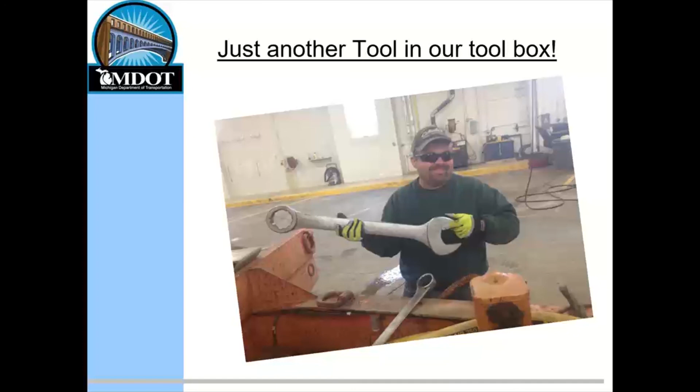Our thin epoxy overlays have become just another tool in our toolbox in Michigan. We've been applying them since the mid-1990s and have had great success with them. Since 2006, our state forces have applied roughly 2 million square feet of thin epoxy overlay, and our Michigan bridge contractors have placed roughly 9 million square feet on our bridge decks.

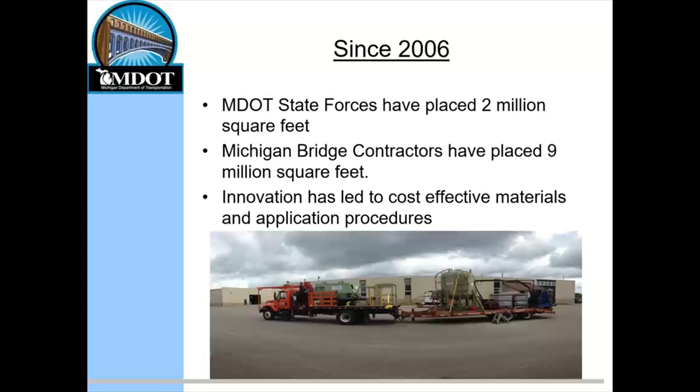We've had several innovations over the years, and we've got a really good tight spec scoping process that we use. For scoping thin epoxy overlays in Michigan, we pretty much look at any bridge deck that's 1 year or older. We like to see our new bridge decks go through at least one season, one cycle of weather, to see how they're holding up before we cover up the surface.

For our older decks, we look at any deck with a deck bottom rating of fair or better. If your deck bottom is already bad, why bother? We also look at a deck surface condition that doesn't have more deck patching necessary than would require a rigid overlay. And also, some of our older decks, the tining is worn off or never had tining to begin with.

We're just looking for a general increase in our skid number. Typical skid number on a tined Michigan bridge deck is only 40. Typical skid number on a Michigan bridge deck with our thin overlay system is 65. We don't use calcined bauxite on all of our thin polymer overlays, so this is just with our standard aggregate.

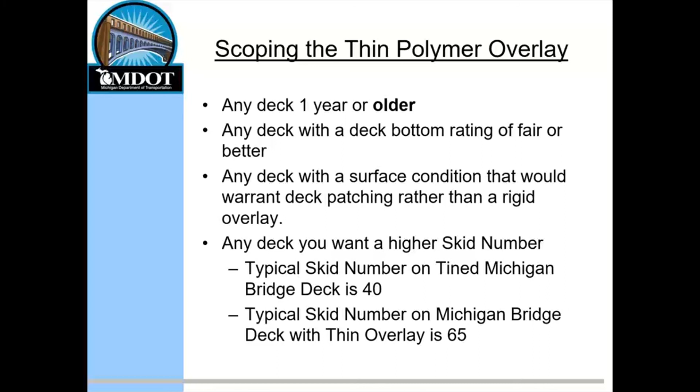The life expectancy of thin epoxy overlays with proper surface preparation—because surface preparation is everything—thin epoxy overlay treatments will last 15 to 20 years in Michigan. Some of our older ones may have some cracks, which you can repair by chasing them with a healer sealer epoxy. You can also repair delaminations. At the end of life, we're having a lot of success, with the snowplows having removed enough of them, milling off the old thin epoxy overlay and replacing another one.

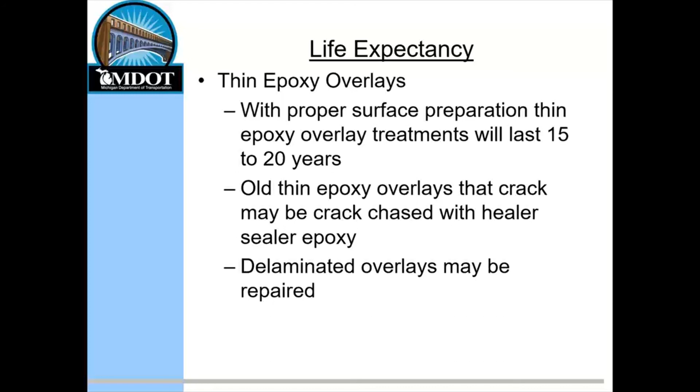We really like our specification in Michigan. It pretty much guarantees that we're going to get 15 to 20 years life. The first thing, not listed here, is that we require a 5-year warranty from our contractors on our thin epoxy overlays. That really incentivizes the contractors to do it right and not cut any corners.

In our experience, if corners are cut, the thin epoxy overlay will fail within the first 2 to 3 years. So that 5-year warranty, if it makes it 5 years without any problem, we know it was put on correctly, and we're pretty much guaranteed that it's going to last 20 years.

Our specification follows closely the ACI 503.3 specification for producing skid-resistant surfaces on concrete. The next couple of slides will show you how we've tweaked that specification a little bit to fit Michigan's needs and guarantee the 20-year life.

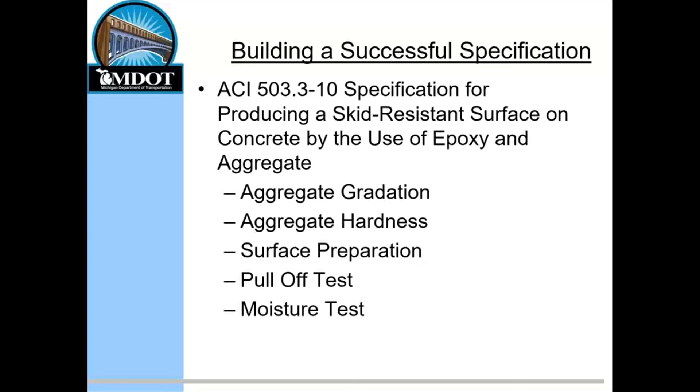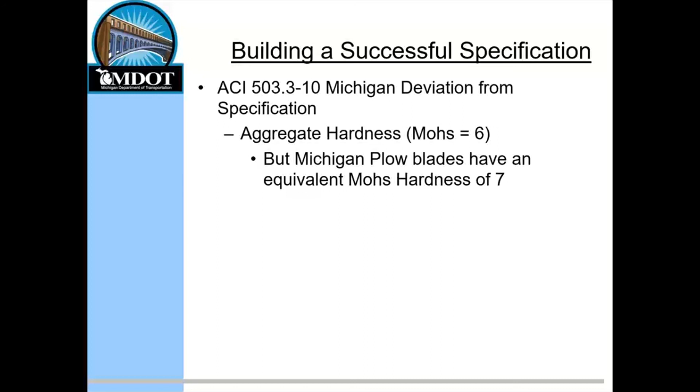Our first deviation: most specifications call for a Mohs hardness of the aggregate of 6. Our Michigan plow blades have an equivalent Mohs hardness of 7. We call for a 7 minimum Mohs hardness on our aggregate in our specification to slow down the polishing of our aggregates.

Another deviation—the ACI spec only indicates that the surface to receive epoxies is to be free of loose and unsound materials and contamination that will affect the cure or adhesion. We kind of look towards ICRI, which states a CSP of 5 or greater for thin overlays.

So in Michigan's experience, to get the 20 years and guarantee adhesion, our spec calls for a CSP of 7 or greater. That's really to help out our inspectors. If the contractor is only shooting for a CSP of 5, there could be areas less than a 5. But if they're shooting for a CSP of 7, you're almost guaranteed to not have any areas on the deck less than that CSP of 5.

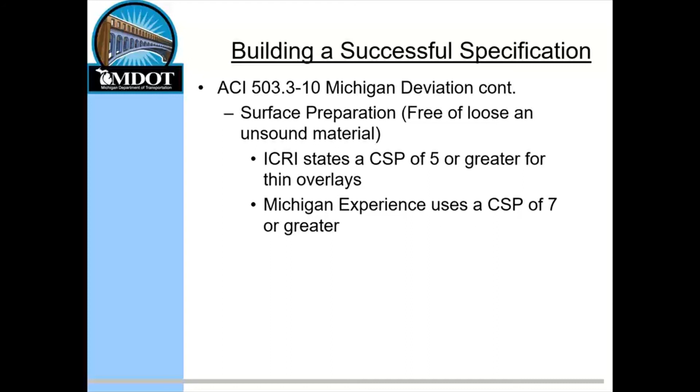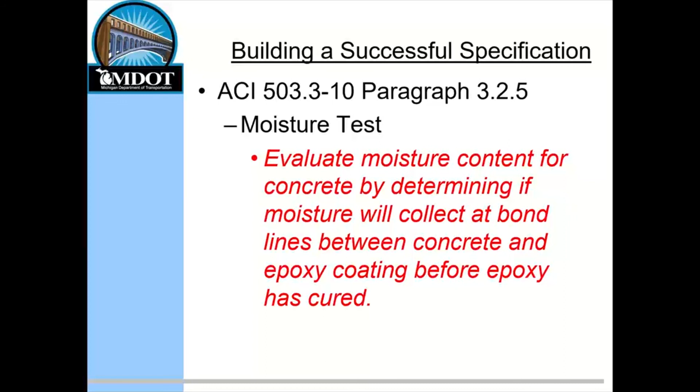Some people try to use a moisture meter to make it an exact science. In Michigan, we just don't use that and we don't allow it. We go with the ASTM D4263 moisture test, which requires a 18-inch by 18-inch polyethylene sheet taped to the deck.

And we evaluate for the condensation. Our test time and our specification is based on the selected product that the contractor is using and the manufacturer's expected cure time given atmospheric conditions at the time of installation. So it can vary.

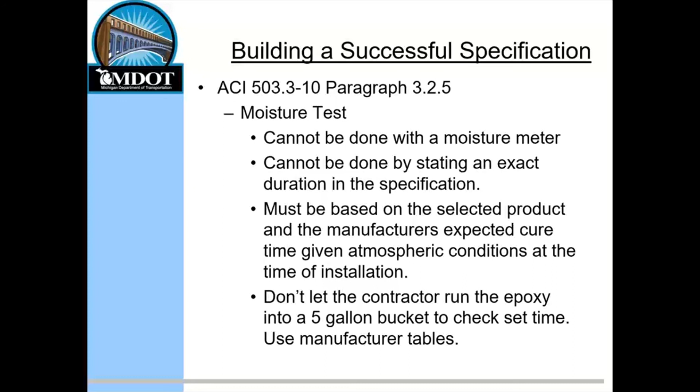But it is what we expect to get that expected cure time. Another thing is to make sure that the contractor doesn't just dump a bunch of epoxy into a 5-gallon bucket and see how long it takes to set. Epoxy is a very exothermic reaction, so that set time won't match the set time that is going to be on your deck. The contractors have to follow the manufacturer's guidelines for set time and temperature.

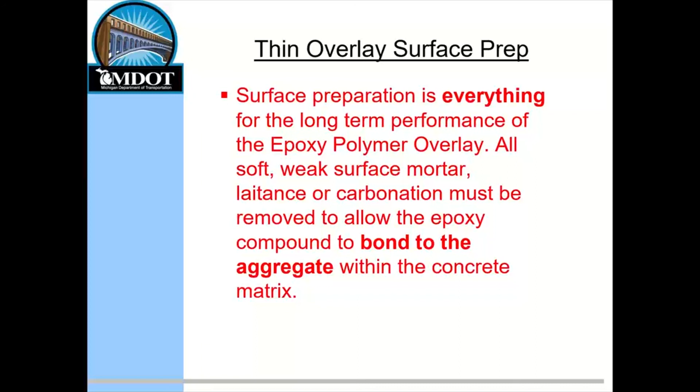Thin overlay surface prep. Surface preparation is everything for the long-term performance of an epoxy overlay. All soft, weak surface mortar, laitance, and carbonation must be removed to allow the epoxy to bond to the aggregate within the concrete matrix. We pulled this out of a couple of sources, and you'll notice that it doesn't say allow the epoxy compound to bond to the cement paste or anything else. It says bond to the aggregate within the concrete matrix.

And it's for that reason that in Michigan, we require our deck tining to be removed. All of our deck tining is installed wet, and it is our belief that the wet installation of the tining will push the aggregate down. So if you're not removing your tining and you're installing your tining wet when you're pouring your deck, then you're not getting as much aggregate exposed and you're not getting as much aggregate to adhere to.

Like Greg said, paint striping is a bond breaker. Paint striping has to be removed. And if any unsound areas are discovered, you have to delay the application. Most manufacturers will not recommend their product be placed over concrete less than 28 days old. And lastly, once the surface is prepared and ready for the overlay, vehicles are no longer allowed on the prepared surface, except for the one vehicle that is distributing the epoxy and the aggregate.

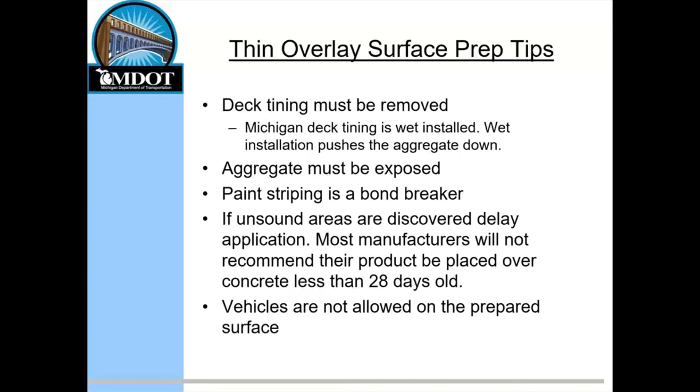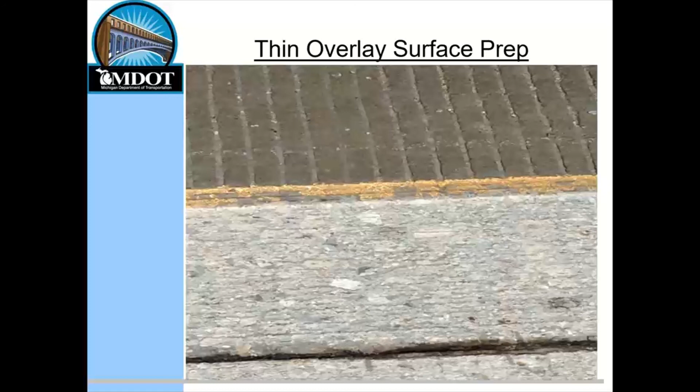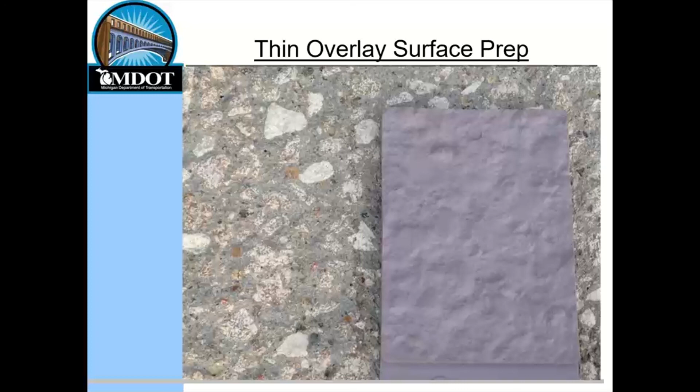Here's where we kind of transition the presentation. Michigan has been applying these thin overlays since the mid-1990s. And like I said, most manufacturers will not recommend their product be placed over concrete less than 28 days old. That ends up being somewhat of a problem in construction. We're always getting the question, well, can we install it earlier? So the rest of my presentation will focus on how Michigan has investigated ways to shorten this time.

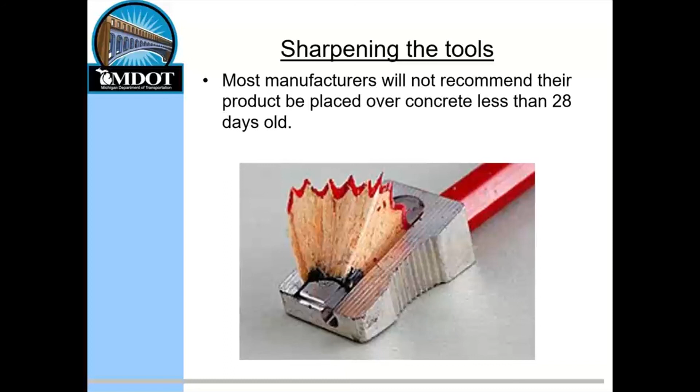One of the easiest ways to sharpen your tools is to attend these AASHTO TSP2 Bridge Preservation Partnership meetings. It's where I got access to vendors for innovative materials, and that's where I started testing non-cementitious patching materials. This led to MDOT developing the special provision for rapid setting polymer patching concrete material. It's for use on jobs with small amounts of deck patching that are going to receive a thin epoxy overlay. And I say small amounts of deck patching because they are quite expensive.

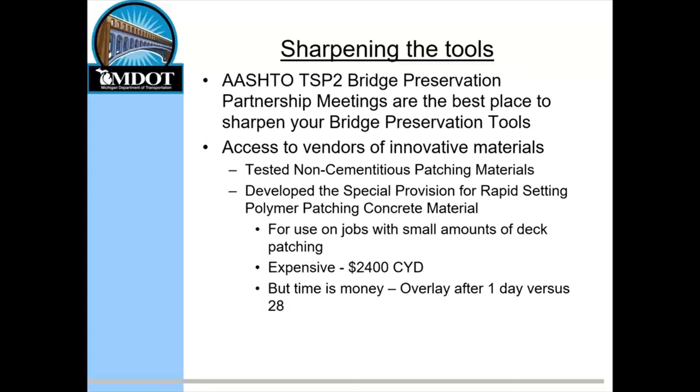They run about $2,400 a cubic yard just for the material alone. But as you know, time is money. And these small deck patches using the non-cementitious patching materials can be overlaid after 1 day versus 28.

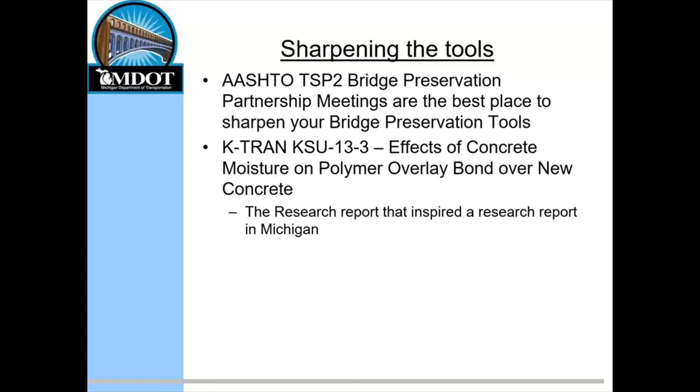Also, at an AASHTO TSP2 Bridge Preservation Partnership meeting, I learned about the research project, KTRAN KSU-13-3, the effects of concrete moisture on polymer overlay bond over new concrete. And that inspired a research submittal that I put in to research Michigan bridge concrete and the epoxy materials that we use, to see if we could come up with a similar result with our mix designs to reduce the age of the concrete at the time of application.

So in this presentation, I'm going to transition here into presenting the results of the research project. It's in a state of almost being complete, they're in the final draft of the report, and this is detailing MDOT's research into reducing the concrete age.

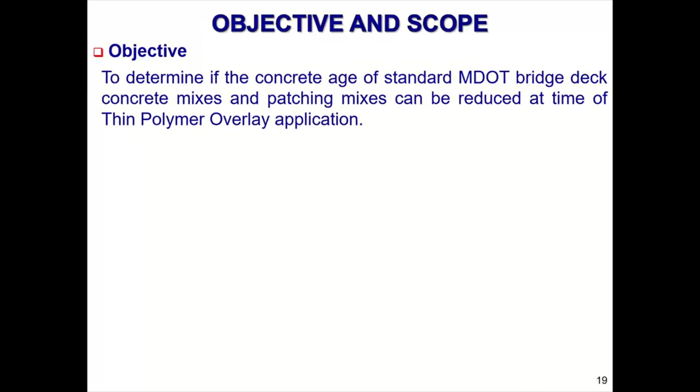But before I begin, I want to note that some of the presentation does have specific product names used, and we don't want to say that this is an endorsement of any of those products. We just chose 2 epoxies that we commonly see in Michigan being used by our contractors and our maintenance crews. This is to determine the concrete age of standard MDOT bridge deck concrete mixes and patching mixes can be reduced at time of thin polymer overlay application.

In order to measure this, Western Michigan University looked at several different variables. They looked at T1.

T1 is the maximum wet curing duration for the concrete to either T1A reach the flexural and compressive strength requirement in our mix design, T1B develop a discontinuous pore structure within the concrete, or T1C develop total permeable voids to ensure concrete durability from air entrainment.

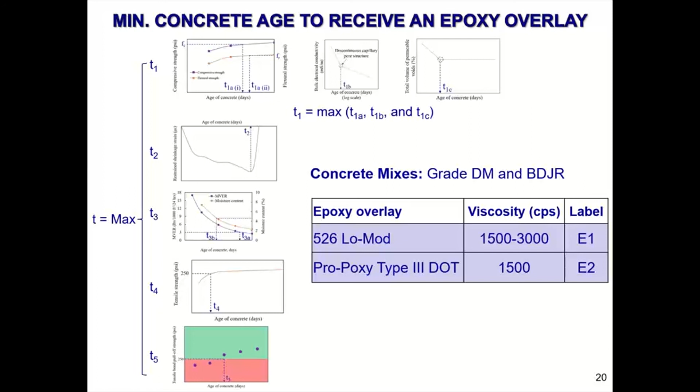They looked at time to cracking, T2. They looked at time to reach an industry standard for moisture vapor emission rate, T3. They looked at T4, the time for concrete to reach 250 psi tensile strength, required to pass the overlay pull-off strength test. And lastly T5, the time to reach 250 psi bond strength between the epoxy overlay and the concrete.

We also looked at 2 MDOT bridge deck mixes: grade DM and grade BDJR. The grade DM substitutes some of the type 1 cement with ground granulated blast furnace slag. So we have 2 different mixes.

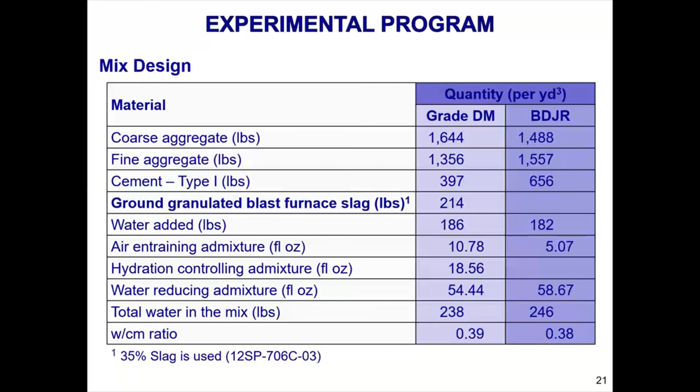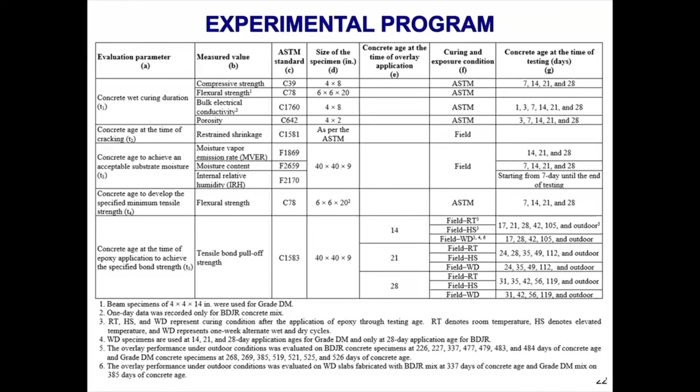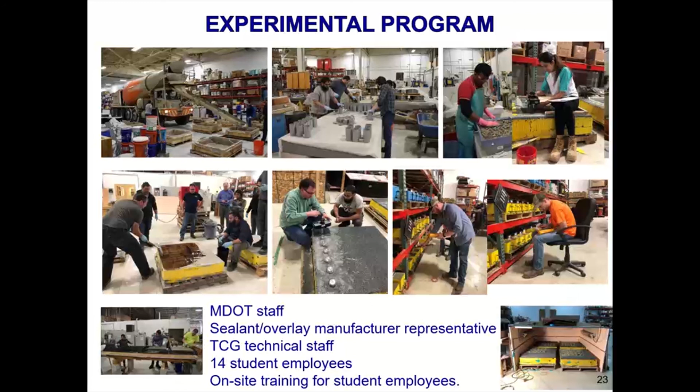Here's some pictures of the process at the Turney Group where all of the concrete slabs were made. It was a collaborative effort - we had several people from MDOT, TSP2 industry partners, as well as Western Michigan University and Turney Group staff.

So they're starting to get into the results after they poured the concrete. They first looked at wet curing duration for our grade DM concrete - you'd want to make sure this would be the minimum at which we could apply an overlay. To meet the strength requirement was 7 days. To meet the discontinuous capillary pore structure took 9 days of wet curing, and to meet the porosity requirement took 10 days of wet curing.

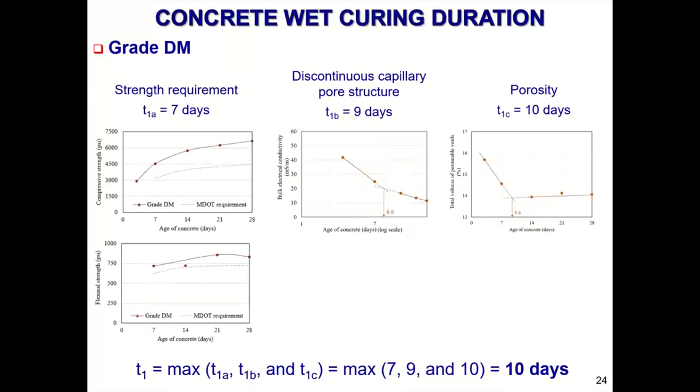As a side note, this ended up pointing out to MDOT that we do not wet cure our grade DM concrete long enough to get the durability that we want. Right now, we only have a 7-day wet cure for our grade DM concrete. So that was just an added bonus of this research project.

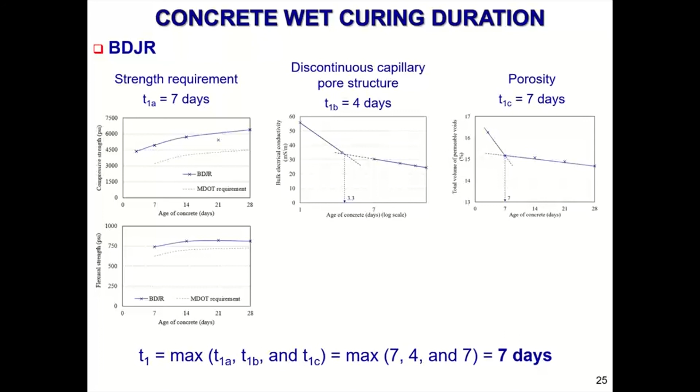For the grade BDJR, you can see that for all 3 of those variables, the maximum amount of time was 7 days. We also looked at concrete at the time of cracking.

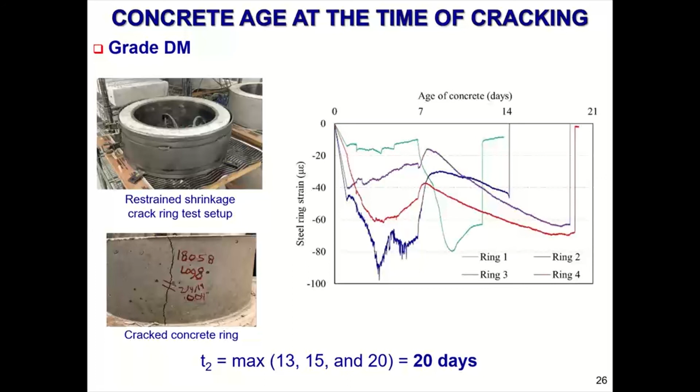Grade DM cracked at 20 days, so we wanted to make sure the concrete had cracked before we placed the thin epoxy overlay. For our grade BDJR, it cracked at 18 days.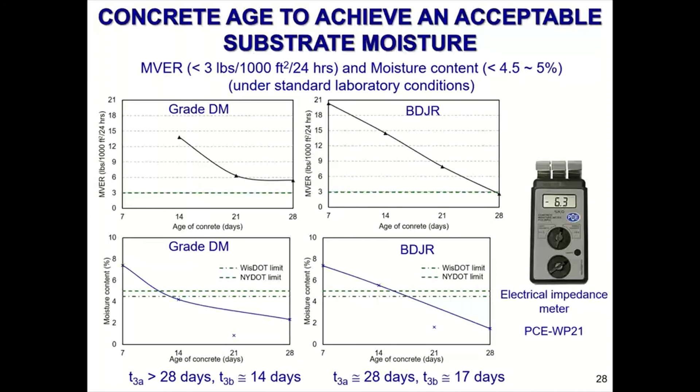You can see that our grade DM concrete never actually hits the moisture vapor emission rate industry standard. But to get underneath the moisture content percent that a few other DOTs use, our grade DM concrete hit that in 14 days, and our grade BDJR concrete hit that in 17 days.

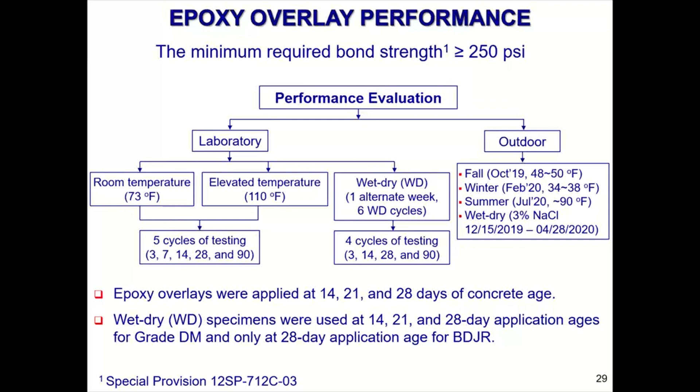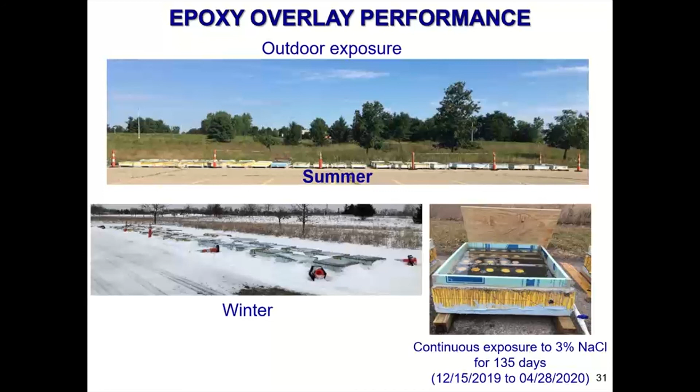Another thing we did was, once they were done in the lab, we said, why don't you take them outside and ship them over from the Turney group to Western Michigan University's engineering building parking lot, and let them sit there and percolate for a couple of winters in Michigan weather.

Let me give a little detail on the different failure modes you can have in a tensile pull-off strength test for thin epoxy overlays. Type A is what you're looking for - the epoxy does not fail, the bond does not fail, instead it fails the concrete. Type B failure is a bond failure between the concrete and the overlay interface. A type C failure is a failure in the overlay itself - you have 2 layers of thin epoxy overlay and you don't want a failure there. Type D is a bond failure between your testing machine and the epoxy.

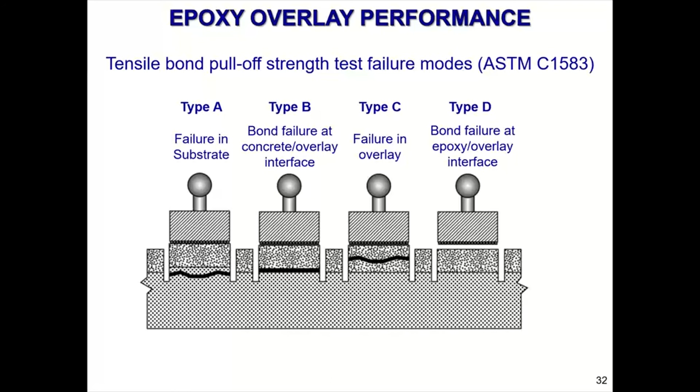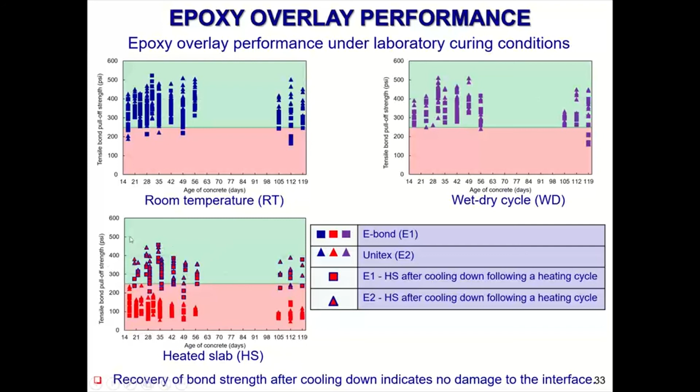In the upper right, you can see that nearly all of the slabs came back greater than 250 PSI in the pull-off test after wet-dry cycles of a salt solution. But in the bottom left, a lot of the slabs tested at 110 degrees Fahrenheit failed. They all failed while heated at 110, but once they retested them after cooling back down to room temperature, they all passed again.

Epoxy overlay performance: this is some of the results we had from the parking lot compared to the lab tests. They performed outdoor testing in October 2019, when the ambient temperature was 48 to 50 degrees and the slabs were all greater than 200 days old. They also tested in February 2020 at about 34 degrees, and all slabs, regardless of concrete age when the overlay was applied, passed the pull-off test. However, all the pull-off tests in July 2020, when the outside temperature was 90, failed—those were less than 250 PSI.

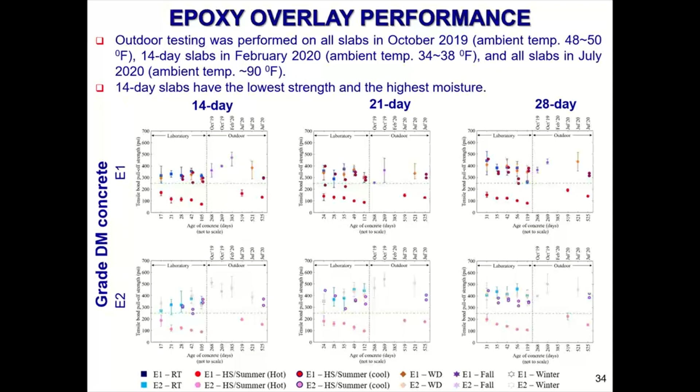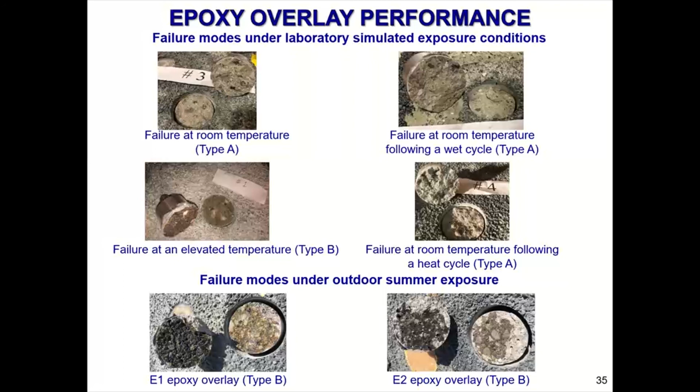Outside, the ones tested in the summer were kind of a mix. There wasn't necessarily a clear pattern—primarily failure at the interface, but also a little bit of failure in the concrete as well.

So, epoxy overlay performance based on these results: MDOT. Basically, several manufacturers limit their substrate temperatures to 90 or 100 degrees at time of installation of thin epoxy overlay. This indicates that we need to update our specification to put an upper bound on the temperature at time of installation, because right now it only has a lower bound.

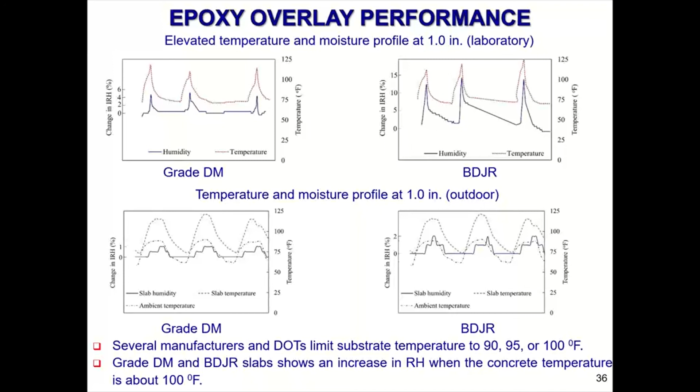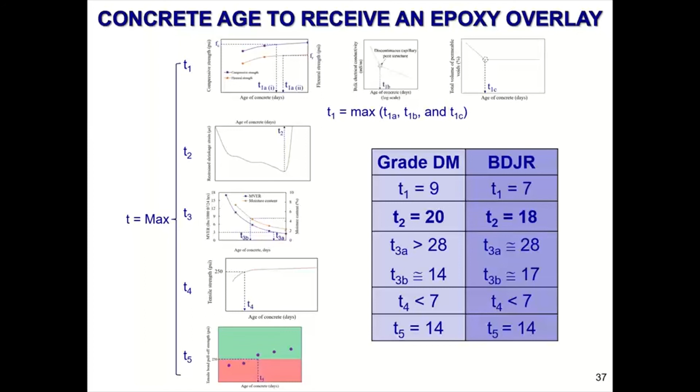This is the results of all the tests. You can see that for grade DM, you shouldn't put the thin polymer overlay on concrete less than 20 days old. For BDJR, you should not put it on concrete less than 18 days old. So the recommendations from the research project to MDOT: epoxy overlays can be applied on bridge decks when grade DM concrete is 20 days old, BDJR 18 days. They're indicating that grade DM gives us better results overall and over time.

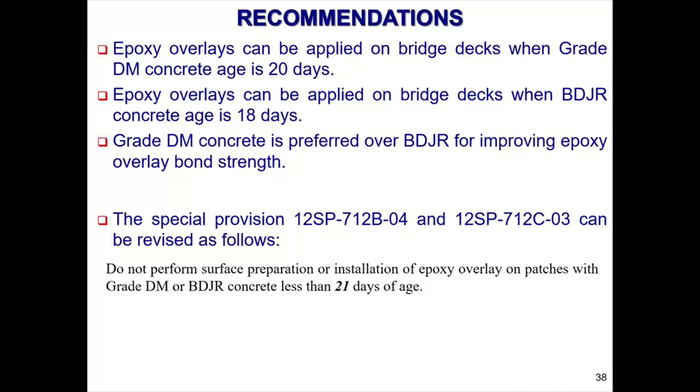So right now they want us to also upgrade our specification to say: do not perform surface preparation or installation of epoxy overlay on patches with grade DM or BDJR concrete less than 21 days of age. Right now it says 28 days. One week may not sound like a lot, but when you're talking about multiple lanes, multiple lane closures, multiple stages of construction, shaving off one week will add up quite significantly to your construction jobs.

Moving forward beyond this project—during the research project, when we started getting back some results, we asked the question: would pre-treating the concrete with a 100% silane before application of an epoxy overlay reduce the vapor transmission rates of the concrete and improve the bond strength? So we made an amendment to the research contract to add that work for them to investigate.

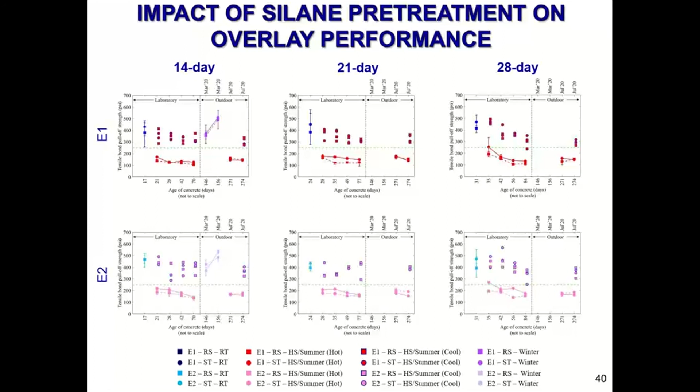A lot of information here, but basically what you're seeing is at early age, it does improve the bond strength, and the older the concrete gets, the less impact the silane pretreatment has. At the same time, it doesn't show any negative impact to applying the silane before the thin polymer overlays. It probably needs a little more research to check a couple more silanes and epoxy materials for material compatibility. Our initial results show that pretreatment with silane improves bond strength at early age at room temperature, with no adverse impact on thin epoxy overlay performance. What I forgot to mention on the last slide was it still didn't improve the performance at high temperatures.